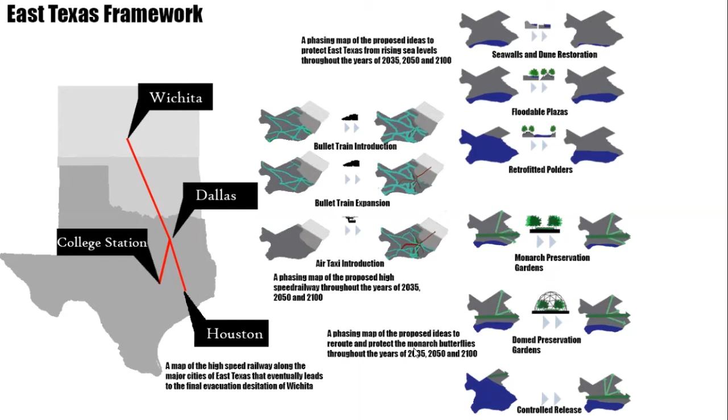Those major cities of Dallas and Houston are currently undergoing a period of heavy development, and as landscape architects, we need to be able to re-influence those cities while they are still redeveloping and redefining themselves. During this presentation, my fellow teammates Austin Partula, Justin Carver, Drew Durkee, and Matt Teague have all pushed ideas and policies which will protect the residents of East Texas and how they will be impacted and what those new changes will mean to them. I've been Jonathan Alvarez, and I thank you so much for your attention. So me and Justin did task 2.

For my portion, I conducted 3 GIS surveys and site analyses to determine which site was most suitable for our proposed infrastructure. The first study looks at the floodplain of Texas for a 100-year, 24-hour storm. Below is a color-coordinated key showing how much precipitation each area of Texas would receive during a storm of this caliber. As you can see, flood risks are significantly higher as you get further east and closer to the coast and Gulf of Mexico.

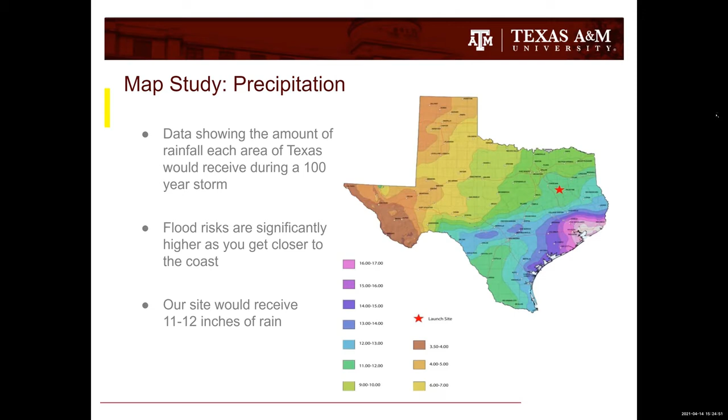As far as East Texas goes, Palestine, Texas, represented by the red star on the graphic, is on the lower end of the spectrum for flood risks. Our site right now would receive around 11 to 12 inches of rain from a 100-year storm.

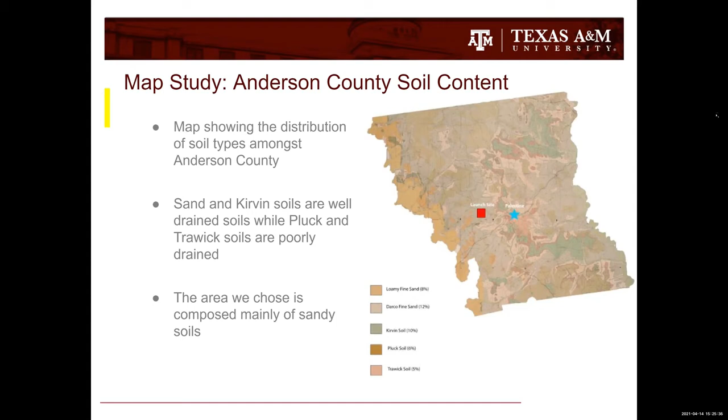The blue star represents downtown Palestine, and the red square is our proposed launch site, just right there on the left.

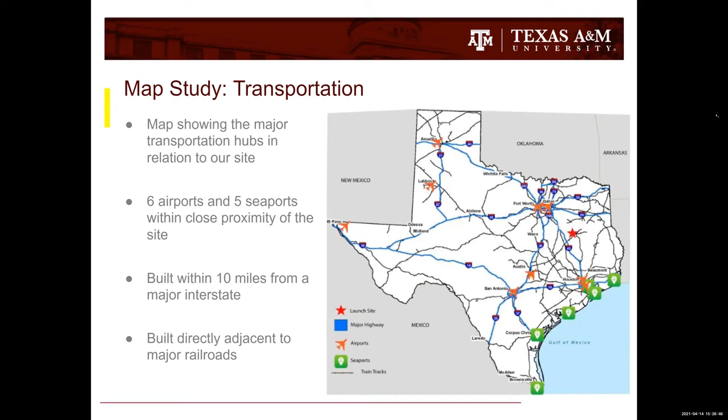Our proposed site is built within 10 miles of a major interstate, Highway 45, a major roadway that goes through Houston and Dallas, all the way up through Oklahoma and the Great Plains—one of the largest highways in the United States. We placed our site directly in the middle of Houston and Dallas, right off this highway, to ensure easy access for both of those large metropolitan populations. It is also built directly adjacent to a major series of railroads, as you can see on the map. These railroad routes could later be converted to above or below ground high-speed rails.

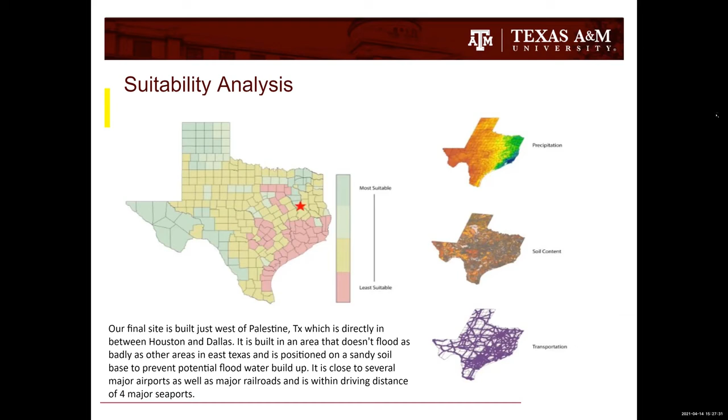This is a final suitability analysis that compiles all the data from the 3 studies I conducted and shows a comprehensive graphic of which counties in Texas are most suitable for infrastructure of this magnitude. Our final site is built just to the west of Palestine, Texas, about 5 miles outside, directly between the major metropolitan areas of Dallas, Fort Worth, and Houston. It is built in an area of Texas that doesn't flood as bad or as often as other areas in the state, and is strategically placed on a sandy soil base to prevent stormwater buildup. It is in close proximity to several major airports, 3 of which are international, close to a major railroad network, and within driving distance of 4 major seaports as well.

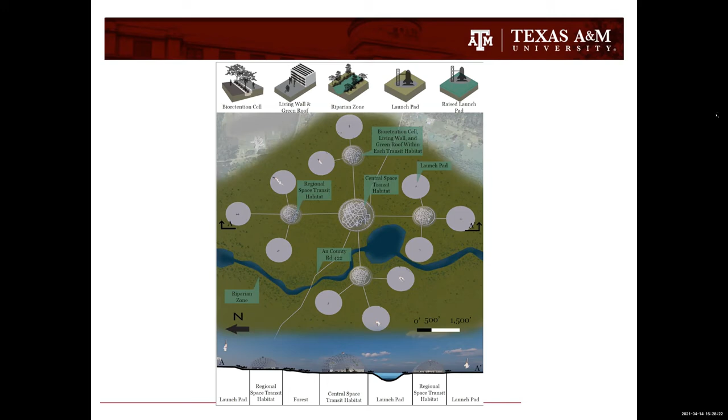The main dome is located on top of An County Road, which is an existing road, to supply efficient transportation. We also have the low point of the site, which would form into a body of water and act as a riparian zone.

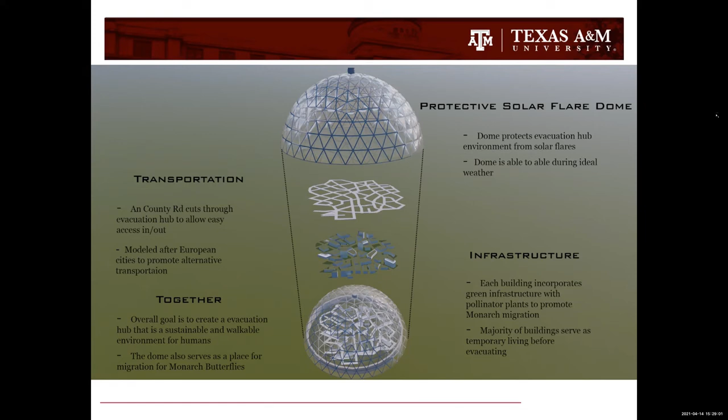And then it would also have $135,000 in annual green benefits.

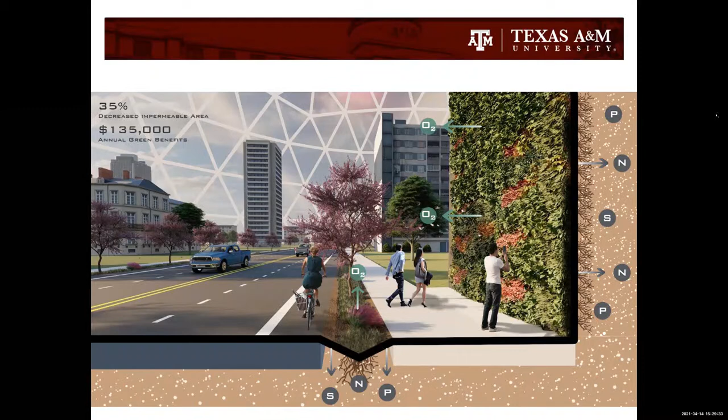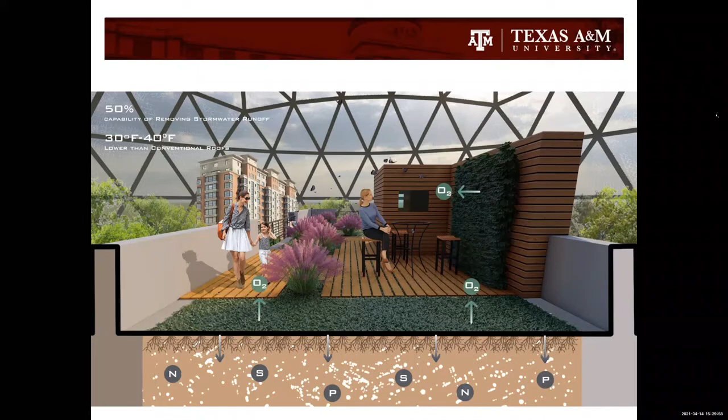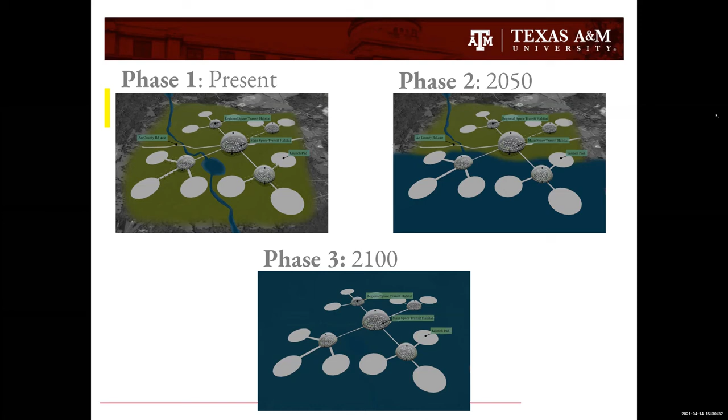Here's a phasing plan of what would happen in case of flooding. It shows how each hub and launch pad will eventually float, so that if it does flood, everyone will still be inside their hubs and be able to evacuate later on.

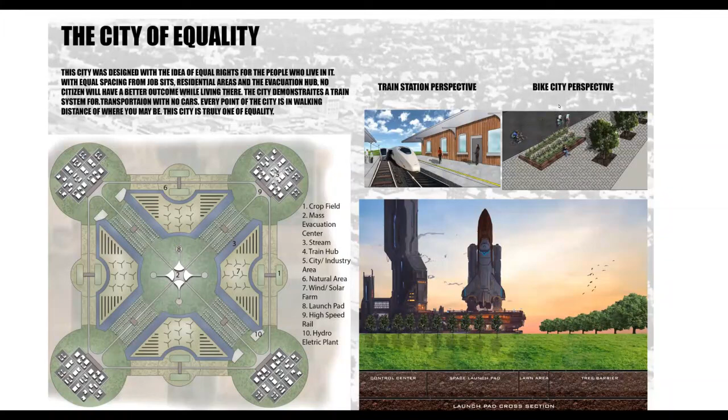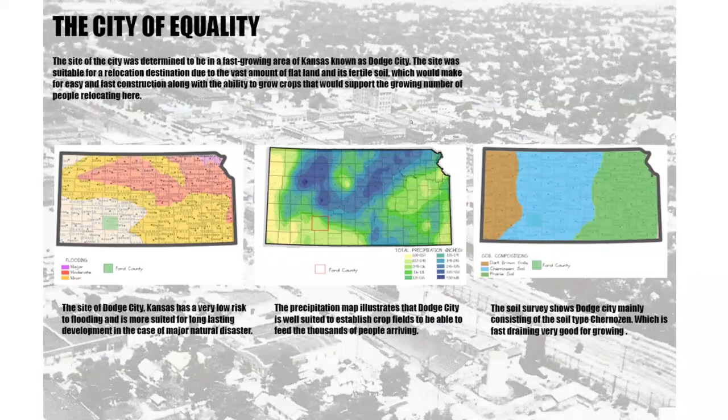So in analyzing all three of these, we put them together to create our suitability analysis, and ultimately we decided on this location, Dodge City, to implement our design. Thank you very much.